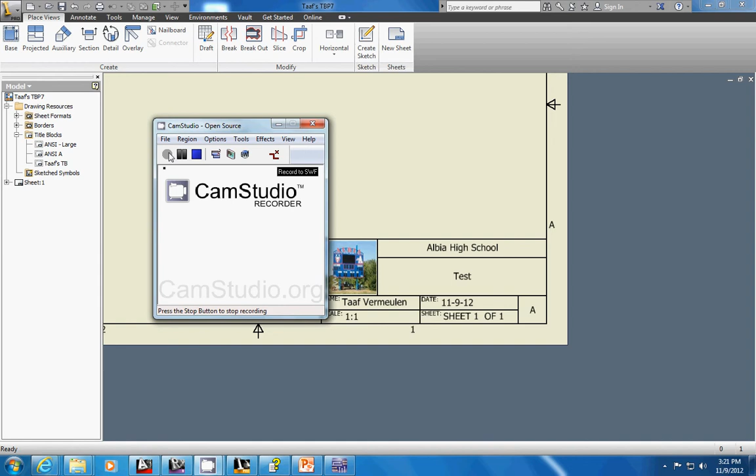Okay, so what we are going to do is put our puzzle cube into the title block we have. This is the test one I just did.

What I need to do is start new, and go to my title block I have already created. I'm going to double click on that. It gives me prompts, so I'll fill in all of these. The first thing obviously is my name, Taaf Vermeulen.

My scale, I'm going to start out setting 1 to 1 on all of these. That's easy enough, 1:1. I'm going to go to date. Today's date is 11/7/12. And the drawing is going to be puzzle, so I'll just call that puzzle.

Correct, today is the 9th. Today is 11/9. I'm trying to keep this week from going too fast.

So once I've typed that in, if you keep up, awesome. If not, watch what I do. You can do it later, and you can always watch this video on Monday.

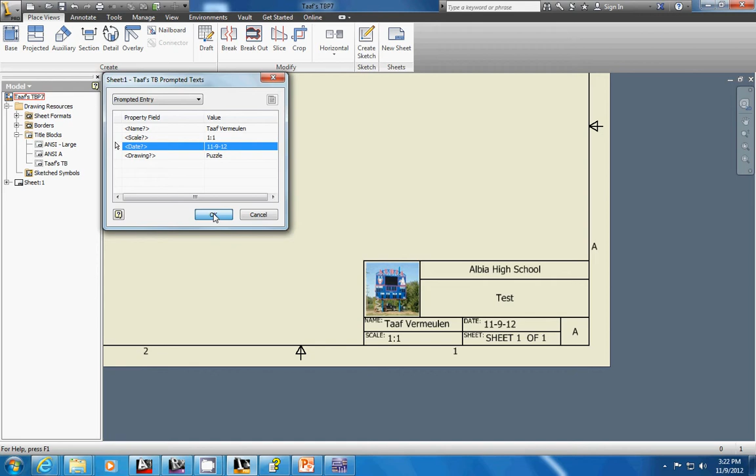So I hit OK, and it starts this sheet for me. The first sheet that we are going to create, I'm going to do a base view, and I want to get an image of my puzzle all together. So I'm going to hit Open.

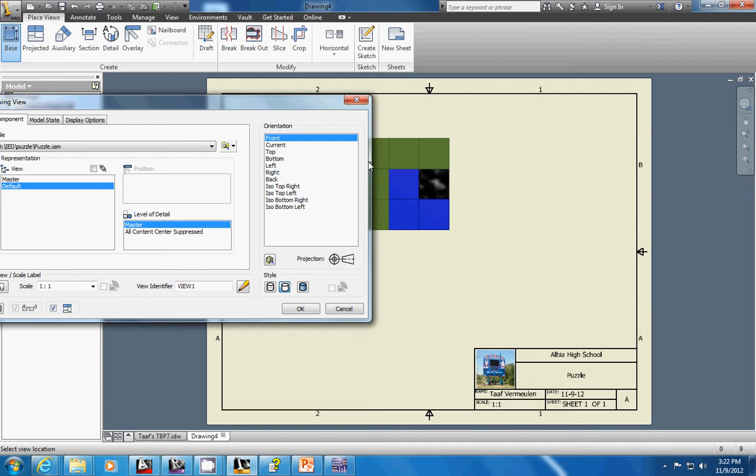I'm going to go into my puzzle, and I want the puzzle all together. So right here, I double click on that. I am going to want an isometric view of it all together on the first sheet. Does not matter which one I pick, I like this one. I am going to place it on the center of my sheet.

That is the only thing that goes on the first sheet. I'm going to escape out so that I do not have to do a projected view. Now, it would be nice if that was colored.

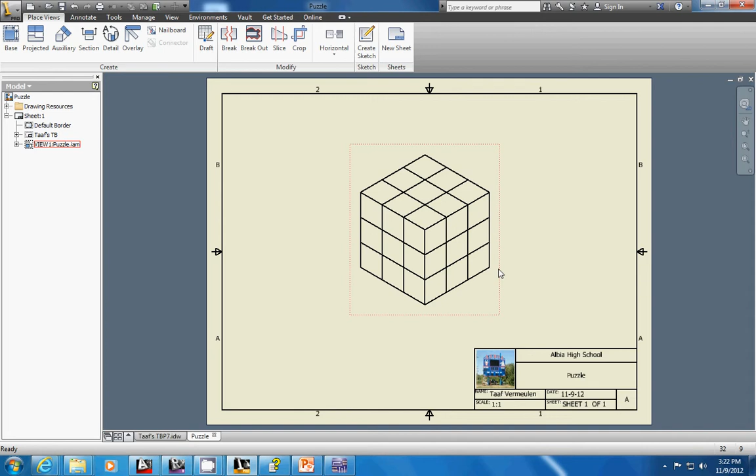Now that I'm escaped out, if I go back to the edge of that where it is lit up red, I can double click on it. It brings up the same box I was just dealing with. Also notice over here that I did have scale 1 to 1. I should have probably mentioned that.

And I can shade it. Right here is how I shade it. Now, if you didn't catch this on the first one, I go slower through it each time so you can catch it on other ones.

I hit OK, that is my first sheet. This is going to have multiple sheets to this file. You are not going to go up to new each time to do that, otherwise it is all separate files.

We can create this like a book, all new sheets from right here. So if you've created the first sheet, you would hit New Sheet. It prompts us again, and I would go ahead and put in my information again.

Scale, once again, I'm going to go ahead and do 1 to 1. I can always change that later if I need. Today's date is the 9th, not the 7th. And the drawing is going to be puzzle explosion, or EXP I'm going to call it, and say OK.

Notice now that I have sheet 1 I can go back to, and sheet 2 that I'm working on. Up here is where I got that base view once again, so base view. I'm going to open an existing file.

Now, some students did not save their IPN. If they did not, they will have to recreate it. This is that exploded view. I double click on that.

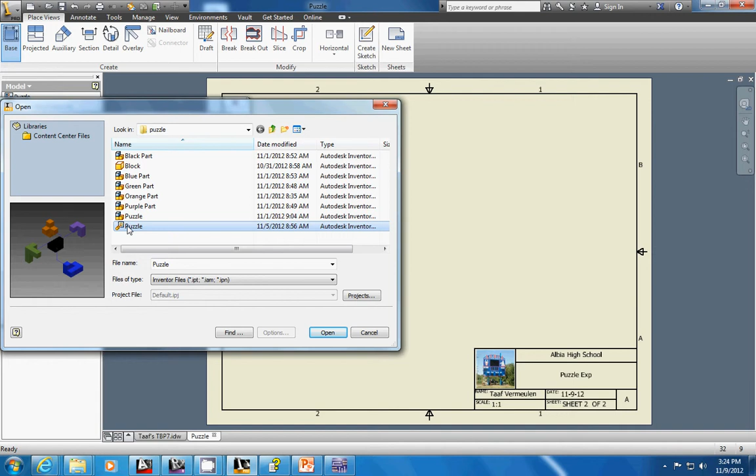I'm going to find an isometric that looks good or matches what I did for my base view puzzle. You can see that that does not fit on my sheet of paper. So I'm going to come over here and change my scale to 1/2. If your 1 to 1 fits, awesome.

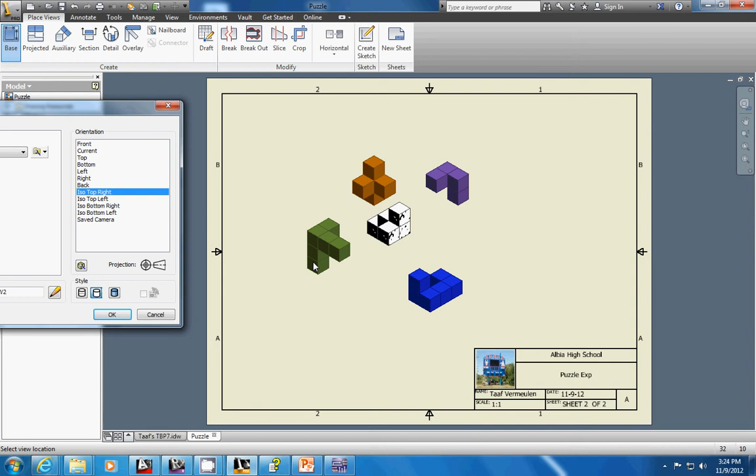If it does not, you'll probably have to change that. I'm going to shade it before I close this. I'm going to place that right there and hit escape so I do not do projected views.

Since I did that 1 to 2 instead of 1 to 1, I will have to change that in my text down here. The way I do that is under my title block on the left-hand side, under sheet 2, I hit plus and double click on field text. It will allow me to edit things I've already done. So right there I changed that 1 to 2. Now it updates down here.

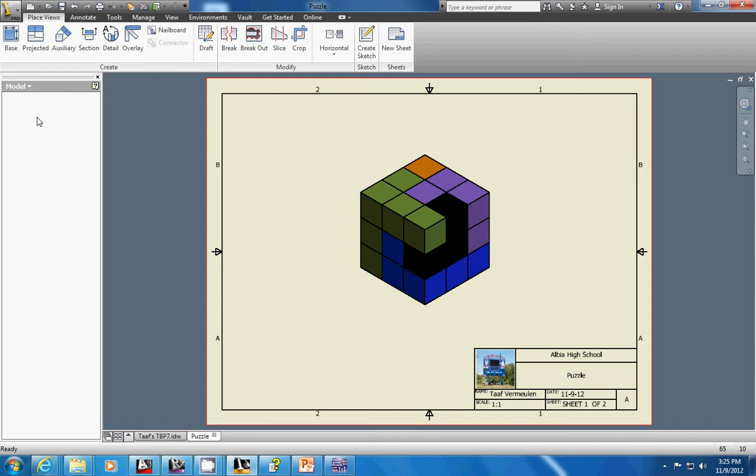Once I have created my assembly, or my assembled drawing all put together in the first page like I have right here, then my second page is the exploded view. Then I will start doing individual drawings of each sheet, or of each puzzle part.

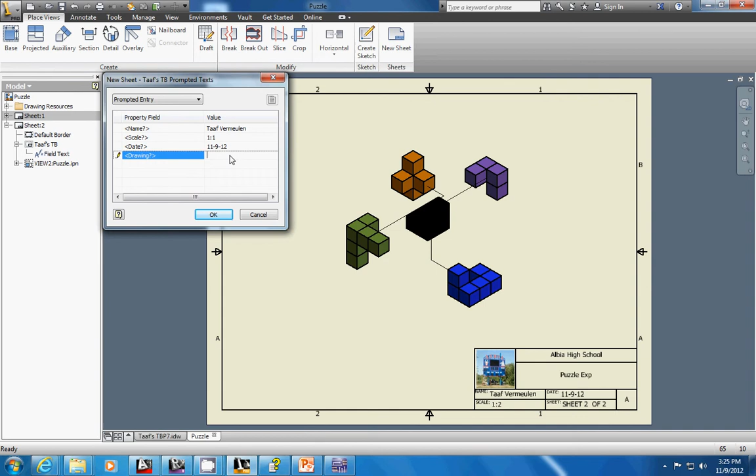So I'm going to do a new sheet again, and I'm going to start with the blue part. It doesn't matter which one I start with. So I'm going to fill this in. My name is still Taaf Vermeulen. I'm going to set the scale 1 to 1 to start with again. Date is 11/9/12, and drawing I'm going to call blue part, and hit OK.

You notice that it updates all of that. I put my base view.

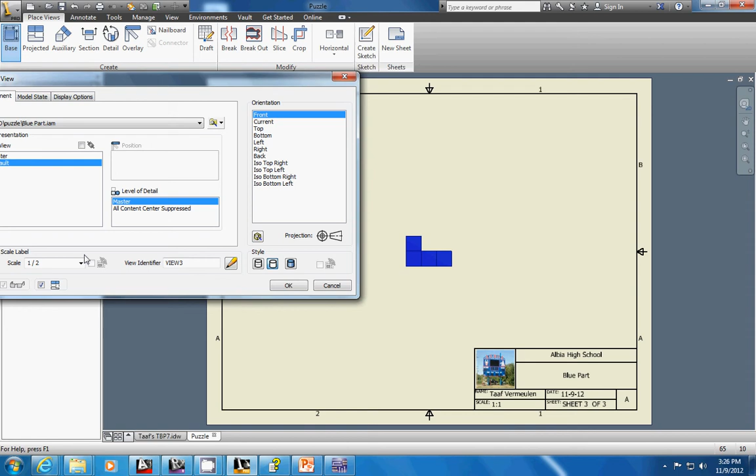Now we're going to do multi-view drawings for each of these. So I'm going to find my blue part, and I have to decide—first I want to set that scale 1 to 1. And I have to decide what makes the best front view. It does not have to be what is labeled as front view here. So if I go down through these and find a better front view, I would place that as my front view. I'm going to go with the front view, just a coincidence.

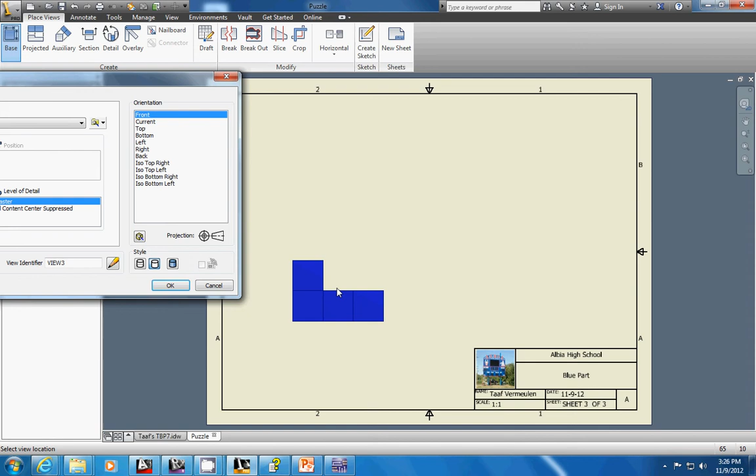We always have to place the front view first, otherwise it does not work right. So I place my front view. I do my projected view to the top, always before we hit escape there—this time I did not. I do my projected right side view, and I can create an isometric as well.

Now, if you hit escape at this point, it will exit out of these and you will not get them. You have to right click, create. It creates all of them for me. I want the isometric shaded, so I'm going to double click on that, shade it, and hit OK. Right there, I am done with that sheet.

So I'm going to demo one more of these and then go ahead and stop the video, and you'll just continue doing it for the rest of them. So I'm going to go through this one a little quicker.

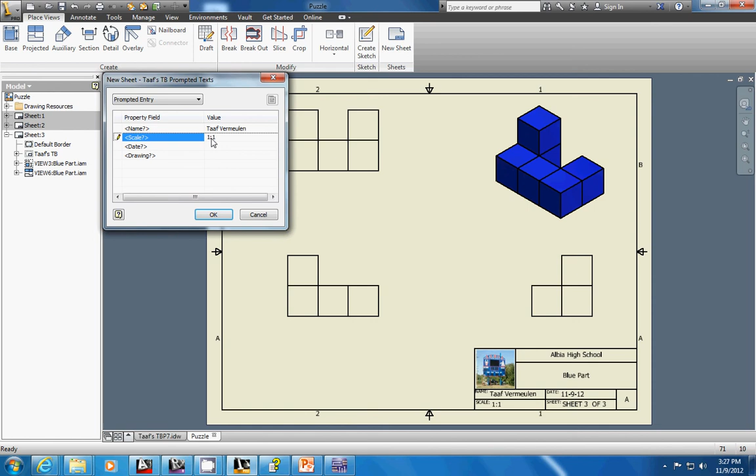New sheet, Taaf Vermeulen. I'm going to do a scale of 1 colon 1. I'm going to do today's date, 11/9/12, and I'm going to do a drawing name of green part. Okay, and I'm going to go ahead and do a base view.

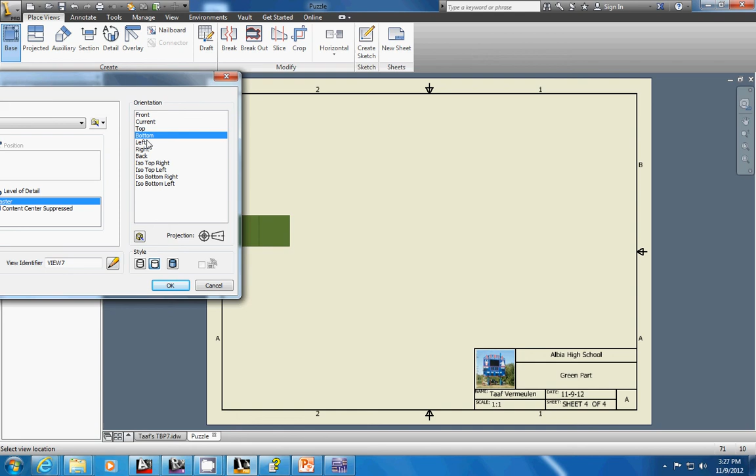I'm going to find my green part, open it up, get green part. I'm going to find a view that I want to use as my front view. I like that one as my front view. Notice it is not front view over here—that's all right. I place that, projected right side, projected top, projected isometric, right click, create, double click on the red box around this.

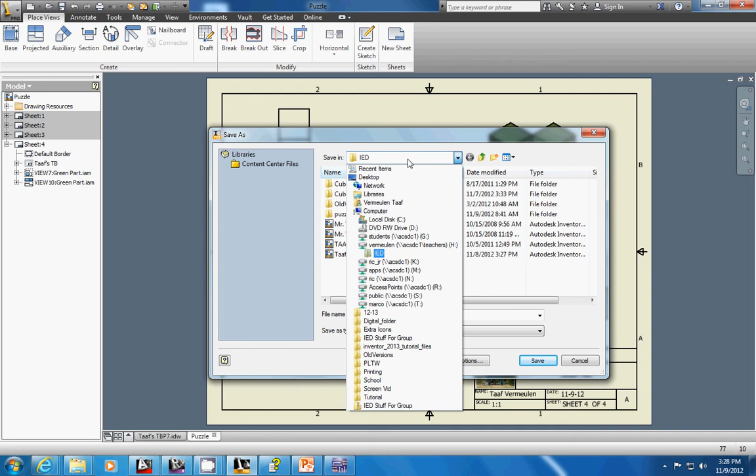I'm going to go ahead and shade that. Okay, and if you save this, it saves all of them. So I'm going to save it in IED, puzzle, drawings, save, and that's what you'll do for the rest of them as well.